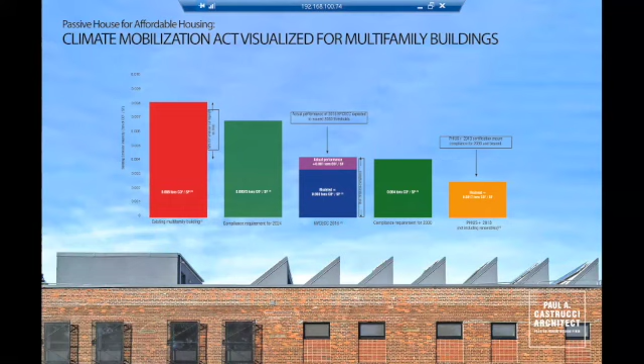Yeah, as you stated, we're going to talk mainly about 3 projects, and those projects are going to be centered around finding high quality and economy in affordable housing and passive house. But I just want to talk really quickly, frame the discussion about how we got here in our history with passive house, and start with our first passive house project from 2009.

It was a 10,000 square foot art and activist community center located in the Lower East Side for a group called ABC No Rio. The project was very much funded by grassroots and hodgepodge together, grassroots funding, a little bit of city funding. And that experience really impressed upon the firm the need to approach passive house really practically, to find ways to build economically, to build in ways that contractors are used to, and with materials that are easily found.

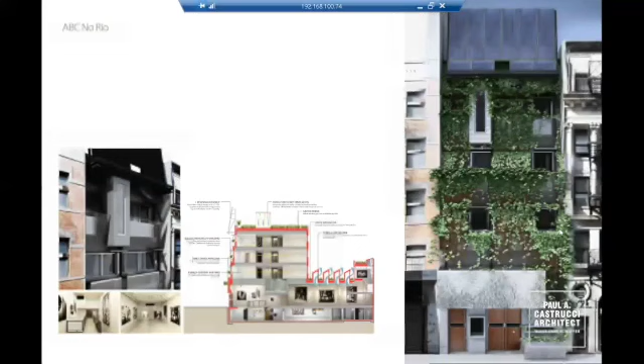So if we advance a couple of slides, fast forward about 5 or 6 years later, next slide if you can. And this is now 2015. We're implementing passive house in one form or another in all of our projects. Whether or not they are certified is another question. And we're finding that a lot of our clients are very receptive to the idea, but we still need to convince other ones. So this is R951.

It's located in Brooklyn. It's an in-house development project, and really is a proof of concept about how we can build to a budget with passive house, but also how it's marketable on a market rate project. So this is a passive house certified, net zero certified row house. It did quite well. The marketing centered around the energy savings, of course, but also the quality of life, sort of best practice, occupant health, and air quality. Okay. So here we're going to be presenting a couple of projects where we did retrofit in 2018.

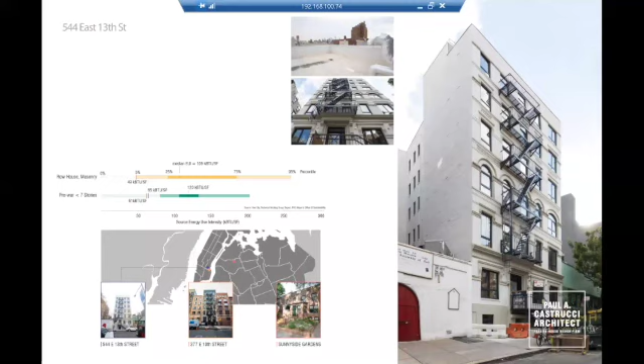So in the photo, what we see here is 544 East 13th Street. This is an affordable co-op multifamily building. It's 6 floors with a basement. So even with our limited budget, we were able to apply the passive house methodology, and internally, we energy benchmark these buildings after a year of occupancy.

So the good news for us is we compared our benchmark energy data for all 3 of these buildings to the city's annual benchmark report. And what we find is that all 3 retrofitted buildings are in the top 5% in terms of their energy efficiency when compared to existing buildings that are the same size and have the same occupancy. So Grayson will now talk a little bit more about some of our current work and larger projects.

Yeah. So just highlighting what Ashok had talked about, we recognize that retrofitting existing buildings is a really important part of the puzzle in bringing high quality affordable housing and getting to carbon neutrality. And it's also important to preserve the diversity of building types and ages in our communities. But in the city and the region, the housing crisis is such that we also need to build new.

And many of our colleague architects are doing really, really good work in affordable housing new construction, especially in bringing passive house to multifamily. And so we want to join and support that effort and push. And really the push is to make passive house the baseline, business as usual for affordable housing and multifamily in New York City. And so we've begun to put our efforts into working on those kinds of projects, and we're seeing them throughout the city, both in the ground and on the boards.

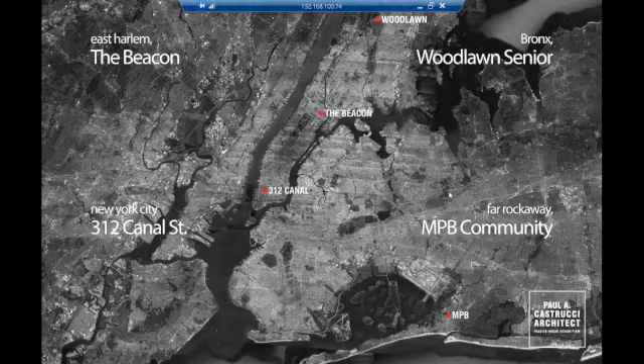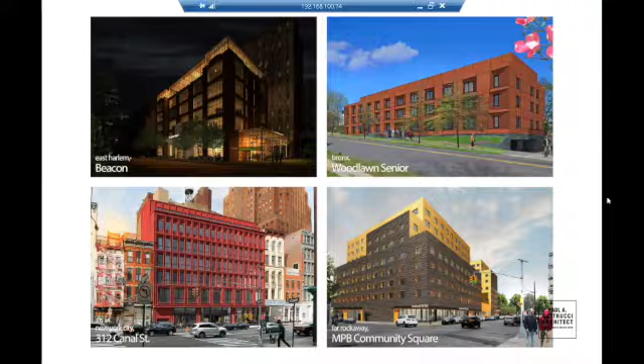If you go to the next slide, these are just a handful of things we have going on. Multifamily of different scales, ranging from 50,000 to 250,000 square feet, 60 units to 250 units. And that brings us to one of the projects we want to highlight today as a case study, which is Woodlawn. Woodlawn Senior is located in the Woodlawn neighborhood of the Bronx, very high up there. It's a 55,000 square foot, 4-story plus cellar, 80 unit affordable housing building slated for use by seniors. It's about 90% complete, and it will be certified by PHIUS.

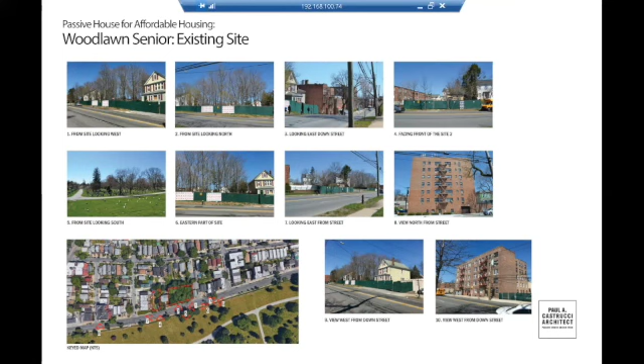Woodlawn is located across the street from the historic Woodlawn Cemetery and just east of Van Cortlandt Park. It's an R5 zoning district, so it's quite low scale, predominantly 1 and 2 family dwellings, but every block or two has a low or medium rise multifamily, of which Woodlawn will be part of that context. And I'll turn it over now to Ashok for a little bit deeper dive into this project.

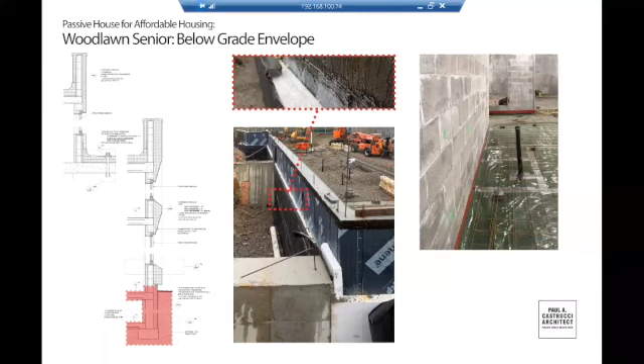The photo on the right is showing the Baker air barrier, and the slab here would have about 2 inches of EPS insulation. So if we look at the exterior grade wall, what we spec'd for the project was either 3 inches of polyiso or 6 inches of EPS that runs continuously. So that's between R20 to R22.5.

So here on top, we see the exterior shell, which is 8 inches of CMU concrete. And then we have our primary air barrier, which is the liquid applied Sto, and then 6 inches of EPS, and finally, there is a stucco finish. So there is no interior insulation, but on the inside, it is furred out.

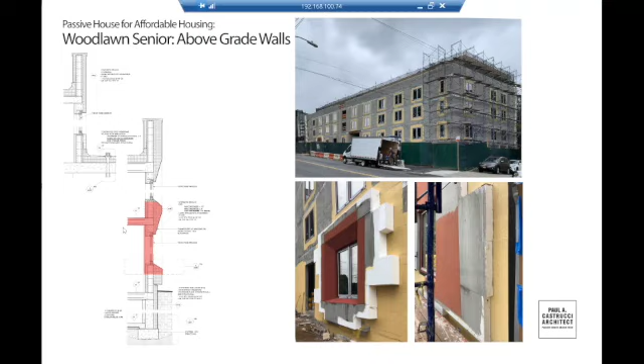But the way we have it here, it allows us to minimize a lot of our thermal bridges and give us a lot of clean details. If we look at the roof, what we spec is about an average of 7 inches of polyiso, which is about an R45, placed above a concrete plank roof.

And you can see here how the parapet detail is treated. What you're seeing here is 4 inches of EIFS on either side of the CMU. You can't quite see the CMU because you've got the wood blocking, and then you have the air barrier, and it will be a continuous metal coping around the parapet.

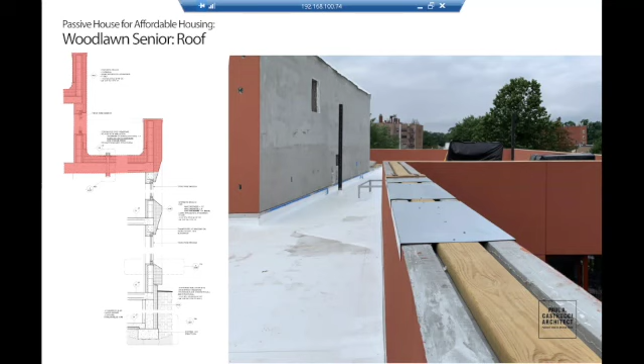If we look at the windows, what we did was we spec triple pane windows. The details here show how we achieve the passive house level air tightness. So the primary air barrier is on the exterior, and we make sure on the exterior everything is taped to make sure the air barrier is continuous.

Additionally, what we have is a secondary air barrier. So we have our wood blocking, and then we wrap our Sto air and waterproofing into the wood blocking, and then we place a window in it. And then around the window, we caulk it all around the edges. And finally, we use the interior air sealing tape all around.

So what we found when we did the mock-up on the window is that in terms of the blower door testing, we did really, really well. So one of the things that we're really curious about in our next project is if we need all the interior taping. So we're going to try that with our mock-ups next time.

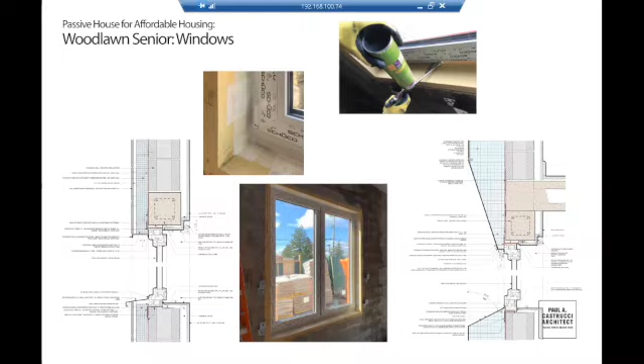And then we also have 4 central ERVs placed on the roof. ERV 1 through 3 are continuous, while ERV 4 is time scheduled. ERV 1 and 2 are serving the apartment units. 3 is for the corridor and utility room. And finally, the 4th one is time scheduled and serves the common spaces in the cellar. So next, Grayson will talk a little bit more about some of the challenges with affordable passive house housing.

Yeah, thanks, Ashok. I am seeing some questions in the chat that are interesting, and we'll circle back to those. But just broadly speaking, the front of Woodlawn is actually 10 inches of EIFS, and that is only because we wanted to chamfer out those windows, and that was one of the questions in the chat. And EIFS is something that can easily be sculpted with those chamfers.

Woodlawn Senior is about done. It's been a successful project. It's on budget. It's on schedule. We're going to be passive house certified. But we're always looking, especially in affordable housing, where you are kind of hemmed in with the budget, for creative ways to get more into our buildings.

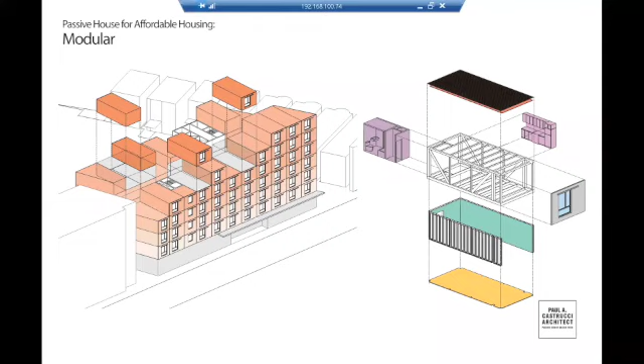And if we could advance it one slide, Ashok, that's in contrast to prefab, which is also something we are exploring in the office and is really promising.

But that prefab is more of a flat pack, prefabricated wall panels or floor panels. And I think that's an area that has a lot of promise. It's just sort of outside of what we're talking about today.

So in thinking about modular, what we're thinking about is, first of all, again, why are we doing it? And the major reasons are cost control, reducing schedule. We think that we can reduce schedule by 25 to 30%, and quality control. And then on the other hand, what are the additional design considerations that we have to review?

And those I'll talk about in more detail, but broadly, the mods themselves have size limitations that you have to plan for. They have height limitations that you have to plan for. So you're going to have a thicker floor line and ceiling in each mod, so that's thicker than block and plank. You have to plan for the stacking of the mods and the transportation. How you implement MEP solutions is going to be quite different, and the testing protocols are going to be a bit different.

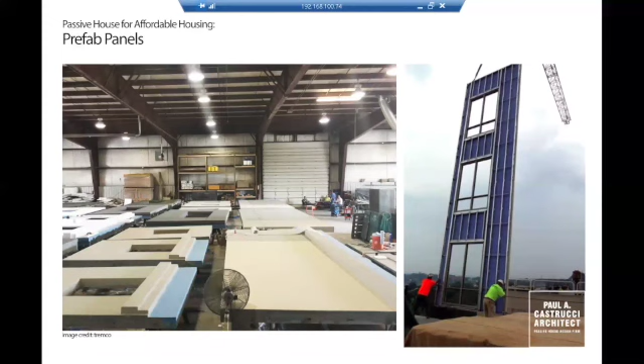So that brings us, I think, to the next slide, Ashok, which is our first of two modular projects. This is Bethany Senior, again, another affordable housing building for seniors. This is located in Brooklyn. It's going to be a 59-unit affordable housing project in the East Flatbush neighborhood of Brooklyn. It's 45,000 square feet. It's going to be PHIUS certified and has about a 130 kilowatt solar array on the roof.

Looking at Bethany, similar to Woodlawn, it's an R4 zoning district. So we have predominantly low-rise one and two family dwellings in the neighborhood. This is replacing a similarly sized institutional building. So we're replacing in kind contextually.

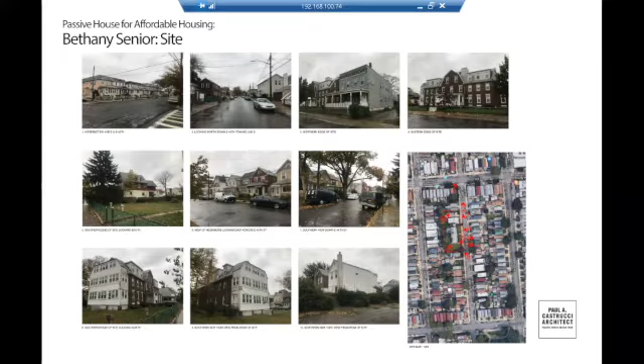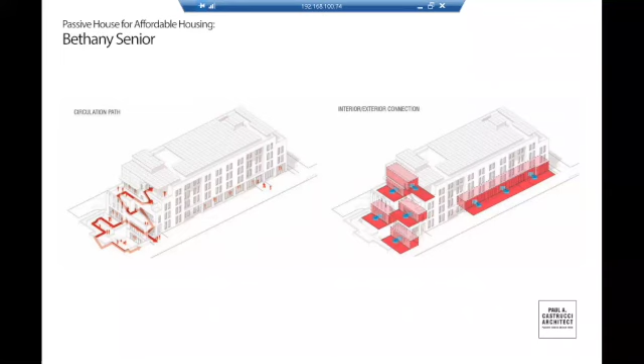A big draw for us in looking at modular as a way to control cost is the ability to get some of our other architectural ideas in there. So the more passive house we can do at the better price point, the more we can get these ideas about creating really dynamic social spaces, creating spaces that encourage activity, and creating indoor-outdoor connections between interior common spaces and really nice exterior gardens. And that's what these conceptual diagrams are showing.

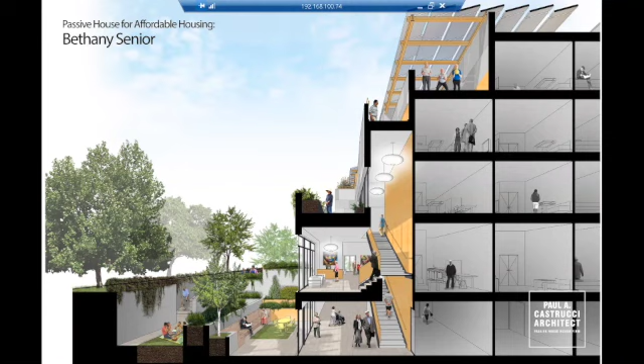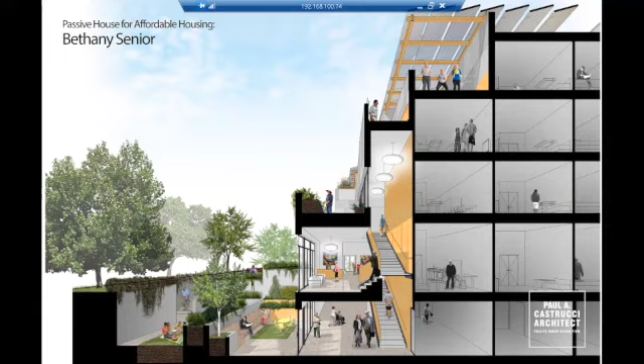And there's a real emphasis on the quality of the interior spaces, light-filled, warm, connection to the outside, but also providing a diversity of kinds of social spaces for meeting in large groups and down to more private recreation, which I think is always important and has been sort of underscored during COVID. Okay, here we're looking at the south, sort of showing those southern terraces.

So in approaching modular, one of the first things we're going to do is think about transportation and how we're getting mods from the factory to the site. So we're going to map out a route from the factory to the site, and that's going to tell us if there are any additional physical dimensional restrictions on our mods beyond what can be built and typically shipped. So if there are low bridges or tunnels that might restrict us a bit more in our mods, we'll map that out.

And then on the site itself, we want to map out where are we stacking our mods, where are we putting our cranes, and what that process is like. And Bethany turned out to be a great project to start with that because it has lots of yards, lots of space for staging, et cetera.

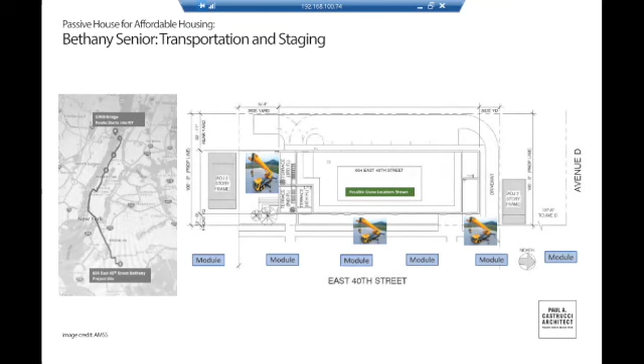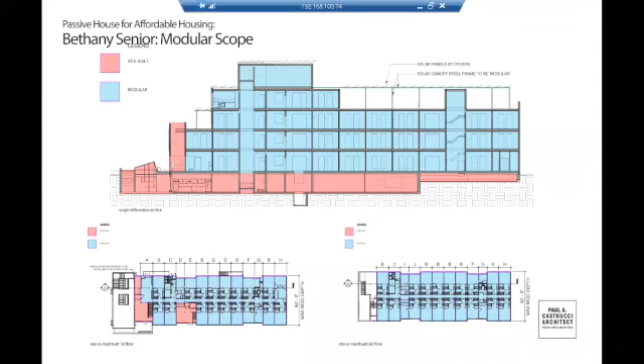The next step is to think about what's modular, what's site built. That is pretty straightforward for Bethany. Everything below grade is site built. Almost everything above grade is factory built. There's a few spaces on the first floor that are site built just because they have unique spans, and in discussions with the contractor, they felt they would be more economical to build those in the field. But for the most part, we're trying to push as much as we can to the factory to control cost and schedule. MEP is done quite differently between Woodlawn and Bethany.

So as Ashok described, Woodlawn had a centralized ERV system which works quite well. It reduces maintenance, but it does have a lot of branch ductwork for ventilation. For Bethany, to reduce that branch ductwork, but also to lean into what modular is, we have individualized ERVs in each unit. And that allows us to deliver a completed ventilation system to the site, built completely in the factory.

There are maintenance trade-offs for that. You do need to get into the units to maintain the ERVs, but for this specific client and the types of residents that will be here, that actually made sense. It was a benefit because they're wanting to check in on these spaces, and coming every month or every couple of months to look at the ERV is just another reason to check in on the residents.

The way that the MEP is integrated in modular is a bit different than typical. In typical construction, you might stack your bathrooms back to back and share your plumbing pipes. Here we want to align everything to the hallway. So all of the plumbing, sprinkler, and electric is going to be in the hallway walls, built in the factory. And then when it's stacked up, that's all left open for the site contractor to come and make all the connections and finish back over.

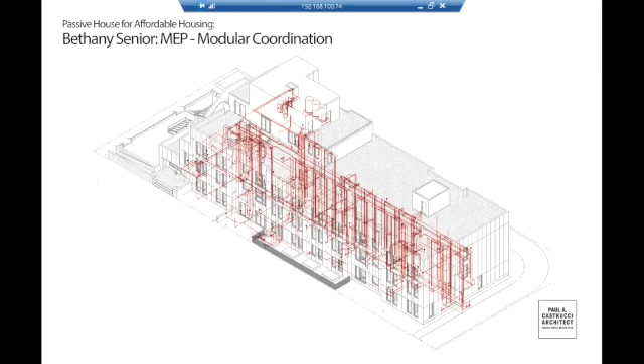The last thing I'll say on the MEP is that it's a fully electrified building. So we're using heat pump hot water heaters. We've looked at a couple of different approaches to that. This one uses 4 hydro kits in our roof mechanical room connected to exterior condensers. It has storage tanks to reduce the peak load and electric reheat when needed. It will use 20% less energy than gas.

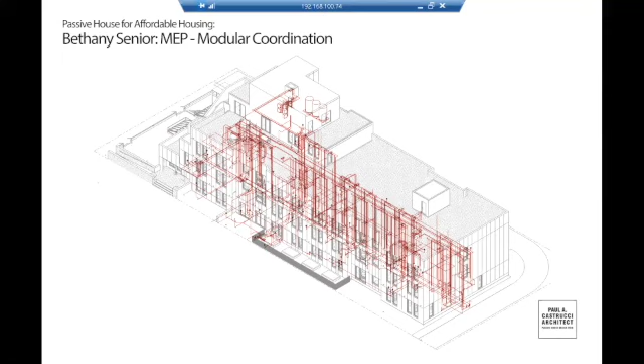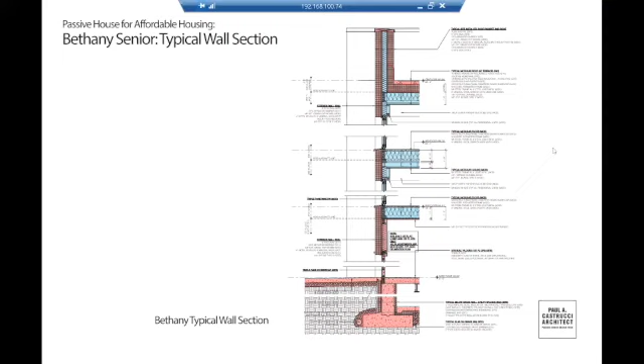So we're going to get the structural sheathing in, our primary air barrier in, and all of our windows in. Those will be air sealed to the air barrier. And then in the field, after the mods are stacked, you have to heal all the edges of the mod. Each mod will have four, a top, a bottom, and two sides, that sit on and connect to other mods. That has to be air sealed to each other. And because on this job they are planning to scaffold the whole building anyway, it made more sense for them to then do the finish as well.

Here's a more zoomed in look at the window detail. Modular construction for this job is steel construction. You have steel beams and steel posts at the corners and some intermittent points, and within that is metal studs. So it's basically a 4-inch metal stud, a triple pane window, and then continuous insulation on the outside that frames over the windows a bit. And our air sealing is on the structural sheathing plane, a really simple tape from the sheathing and air barrier to the window, all-around detail.

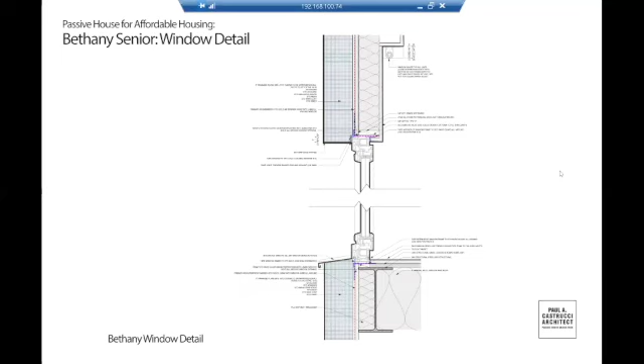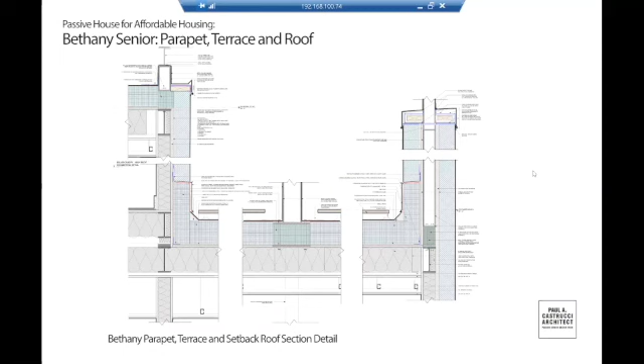I think that wraps up a brief discussion of Bethany. And so I'll hand it back to you, Ashok, to look at Habitat.

Great. Thank you, Grayson. So Habitat Net Zero, it's an initiative by NYCHA Next Generation.

These are small single-family or 2-family homes, and they will be built to PHIUS standards, but not certified. So to give some context, the city of New York sought to develop energy efficient, small, affordable homes on many of the foreclosed homes and lots from the 2008 recession. So this project represents sort of the first wave where we're trying to develop 13 sites, and they're spread all across Queens. So here are some of the images showing the existing conditions of these homes.

So one of the interesting things is that there are many factors to consider here. So for example, the site orientation, the topography, each site has different areas, different zoning regulations, transportation, crane access. So as designers, we really look to find commonalities between all these sites and propose sort of a prototype.

So a significant goal for us here is to sort of create a methodology to build healthy, energy efficient homes where families can thrive, but at a price point that is very affordable. And so the project scalability, especially on a citywide basis, is a very critical success metric for us.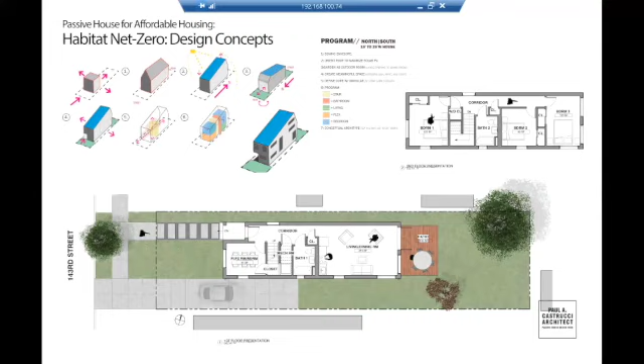So some of the core principles we have is trying to optimize the space to provide the maximum number of bedrooms allowed by code. Again, we placed the living space in the rear and connected it to the backyard to open up the space and provide this link between the interior and exterior. And we also have this concept called the flex room, where we're designing a dining room or a den, but it can be converted into a bedroom to allow families to age in place.

So this slide shows how the mods come together on the site. So basically, the general contractor will first build the foundation on site, then the first mod would be craned in, and the second mod, and then we would have a modular solar parapet and solar panels that's also craned into place. Finally, the contractor will come along, build the stairs, patio, and do some air sealing as well.

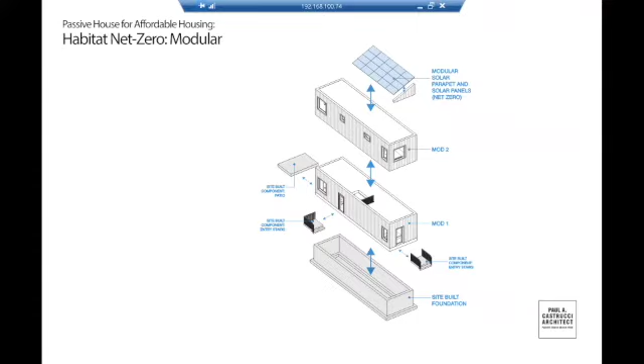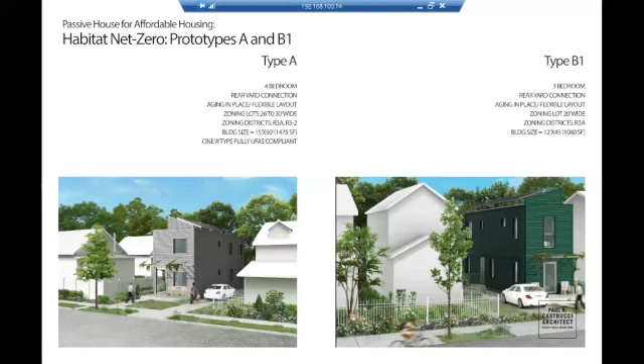These are the 4 final prototypes. We have here type A, which is the first prototype. All of our prototypes have the living room in the rear and connection to the yard. Prototype A is meant for lot sizes that are between 26 to 30 feet, and it has 4 bedrooms. So our prototype B1 is our narrowest lot, and it's about 20 feet, and it has about 3 bedrooms.

So on 3 of our sites, we were able to have 2-family homes, and they're basically 2 B1 types next to each other. And finally, we have our smallest lot type, which is our type C, and it has 2 bedrooms. And these are our smallest, and the size was governed by the zoning.

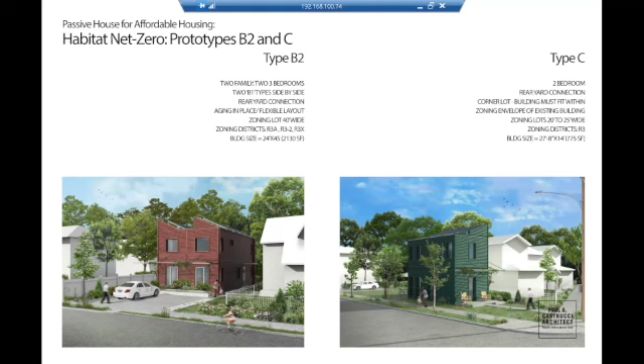If we were to look at the detail, this is very similar to Bethany, where we have much thicker floors. So the cladding and exterior insulation are factory installed. What we want to focus on here is also the mate line detail. It's very critical because this is where we have to ensure the continuity of insulation and air barrier. So we have the double floor plate between the first and second floor, and what we did was about 1 foot around the mate line would not have insulation.

So once the 2 mods are craned into place, the general contractor will go around to ensure that the air barrier and the weather barrier are continuous, and then put the insulation and the finish. So the home is wrapped with about 3 inches of polyiso, except for the roof where we have a little bit more insulation. And where we have our thermal bridge is really where the mods will connect to the foundation. But we use Armatherm to reduce that thermal bridging.

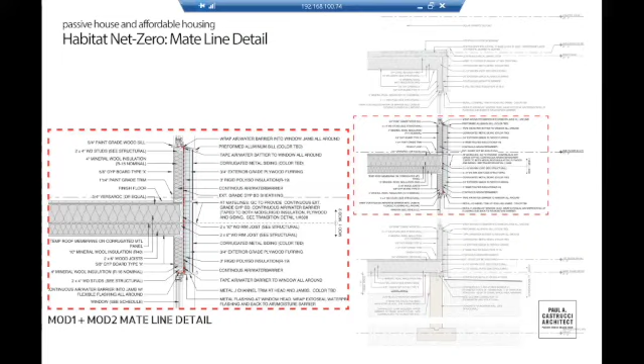As we start looking into these projects, we start thinking about carbon emission through the life cycle. And since carbon emission is a critical metric for us, it's important to note that we don't really have the full picture on modular for Bethany Senior, but we looked at a study to start having this conversation. So there would be some material savings through modular, but when it comes to Bethany Senior, we're also using a lot more steel. So that's where we're not completely sure.

But when we look at carbon emission during the construction process, we can measure that based on the transportation of materials, the equipment used on site, and the electricity used on site. So what we did here was we looked at a 60-year life cycle. And what we find is that based on some literature review, as well as some energy modeling we did in-house, the operational carbon reduces from about 50% from code build to about 30% when we do passive house. So we have room to further reduce our carbon emission. And this is where we want to start investigating the embodied carbon.

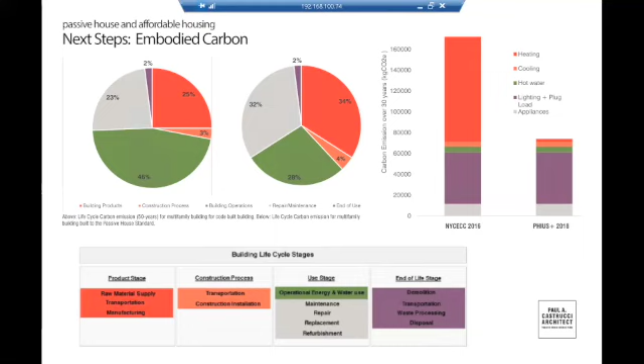So what we did is our study uses the embodied carbon calculator, the EC3, and we looked at 3 different types of materials: the insulation, the concrete, and steel. And we studied how much carbon we could reduce by considering materials that have lower embodied carbon. So, you know, we're just looking at the typical materials that are being used in projects, and then we're substituting that with other materials that would have lower embodied carbon.

So when we look at a 30-year life cycle, and we compare going from New York City Energy Conservation Code 2016 to PHIUS 2018, we see a 40% carbon emission reduction from baseline. But then when we start looking at the embodied carbon and just looking at these 3 materials, we could further reduce the carbon emission by 20 more percent. So I think, especially in the context of Local Law 97, this is really important to look at embodied carbon, because when it comes to operational carbon, we could always reduce it throughout the life cycle of the building. But once we build the building or retrofit the building, we can't reduce that embodied carbon.

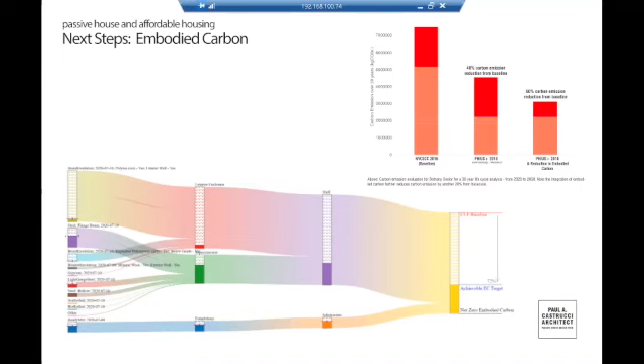So Grayson now will talk about other initiatives we are taking in our firm to further reduce energy and carbon emission for buildings. Yeah, thank you, Ashok. Just to wrap up, we're always looking for better ways to do this work, and also to make better buildings and to drive down energy. And so just for the purposes of conversation, I'll talk about a couple of initiatives like embodied carbon that we're just now embarking on. We don't really know where this ends up, but it's just what we're thinking about.

And one is, after we've driven down all of our energy use as best we can through the thermal envelope solutions and MEP solutions, that next big thing is the user. You have very little control over it, but we're starting to at least try to understand how things are being used. So we're pushing to get as much granular monitoring as we can, both on the water and the electric side, hopefully per circuit, and that does a couple things. First of all, you can find outliers. So if something's wrong, you can identify it and fix it, which is important. But the hope is that it will help us understand how users are using the building in ways we can make it better and drive energy use down.

And we're also exploring, or at least beginning to talk about, ways to put that into a feedback loop where what the residents are using gets fed back to them in a way that hopefully influences their use patterns.